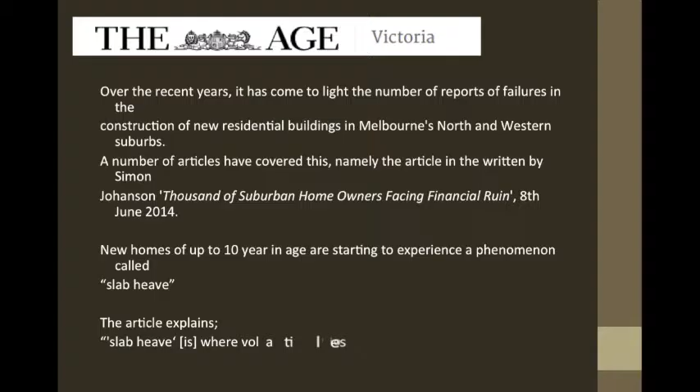Although an extreme title, it concisely sums up the problems being faced by many residents in the northern and western suburban developments. New homes up to 10 years in age are starting to experience a phenomenon called slab heave. As the article explains, slab heave is where volatile soil movements under a home's foundation cause walls to crack, doors and windows to jam, and floors to tilt.

It has highlighted this as a major problem and blames this on inadequate soil reports, suggesting that many thousands of new homeowners in the Wyndham, Melton and Hume local government areas are affected by volatile soil movements occurring under the home's foundation. This is causing walls to crack, doors and windows to jam, and floors to tilt in newly developed homes.

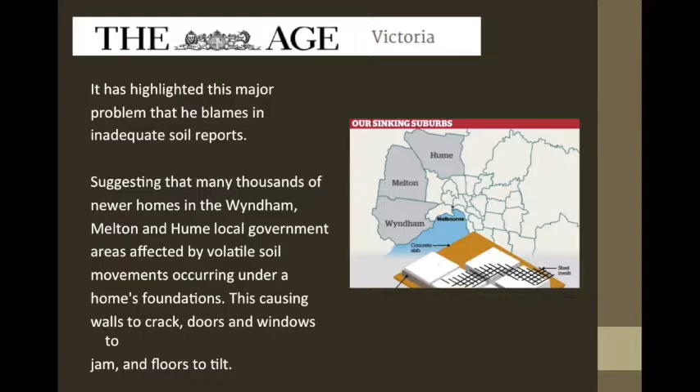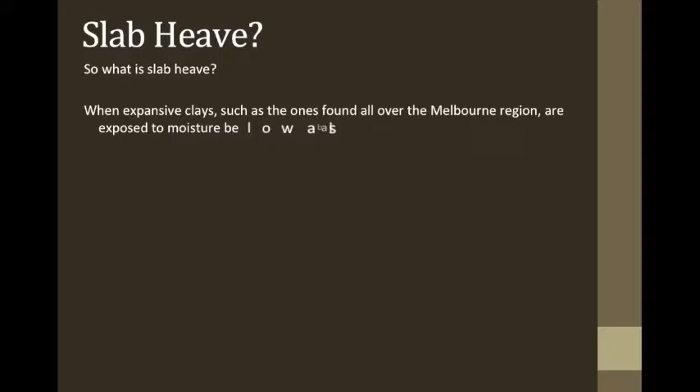So what is slab heave? Slab heave is when expansive clays, such as the ones found all over the Melbourne region, are exposed to moisture below the slab. This results in the clay swelling and expanding, pushing the centre of the slab upward.

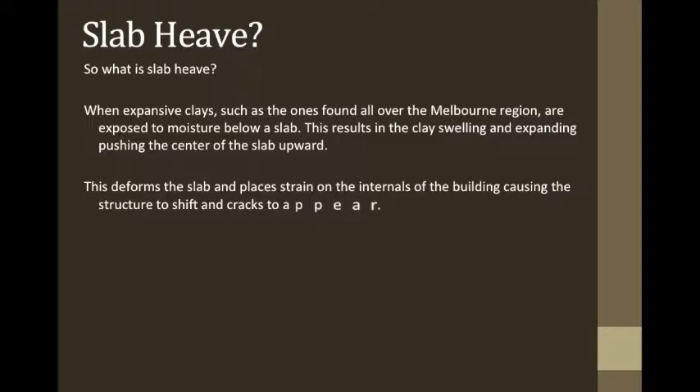This deforms the slab and places strain on the internals of the building, causing the structure to shift and cracks to appear. As you can see in the diagrams, it's where water is pooling unevenly under the building, pushing up in the case of expansive soils when there's too much water content, putting pressure on the slab. Or in reverse, once it's really dry, such as during the drought Melbourne faced for a long time, the soil will shrink, having the adverse effect on the slab.

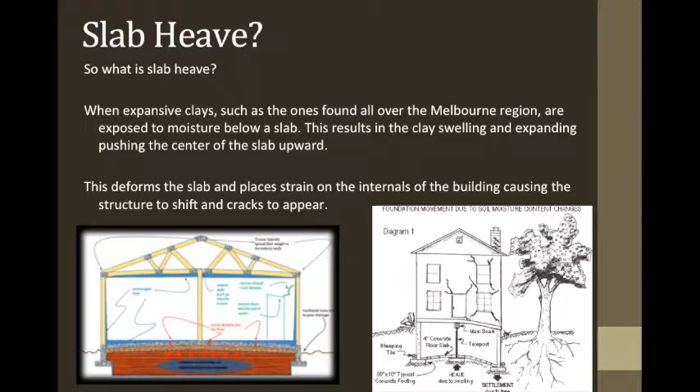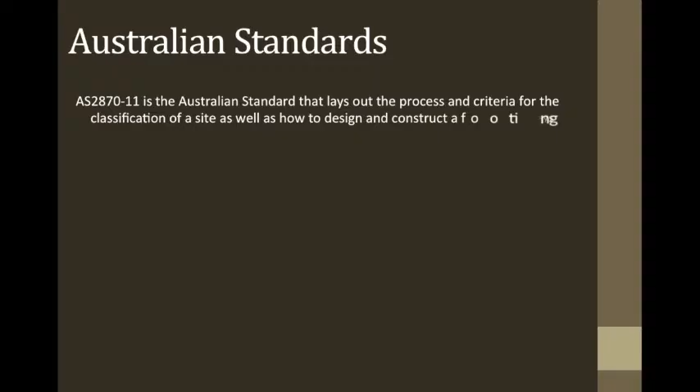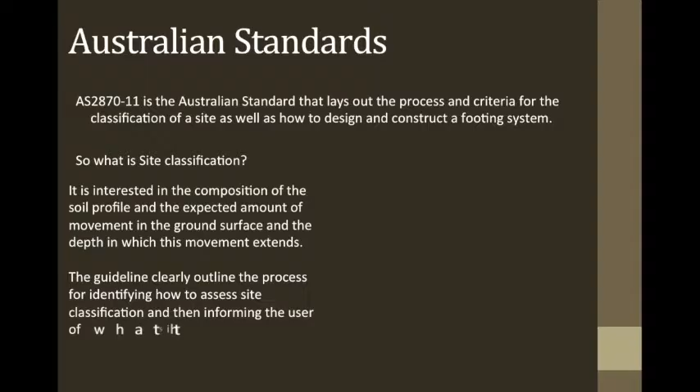Australian Standard 2870 version 2011 is the Australian standard that lays out the process and criteria for the classification of a site, as well as how to design and construct the footing system. So what is a site classification? It is interested in the composition of the soil profile and the expected amount of movement in the ground surface, and the depth to which this movement extends. The guideline clearly outlines the process for identifying and assessing the site classification and then informing the user of what this means and what they need to do next.

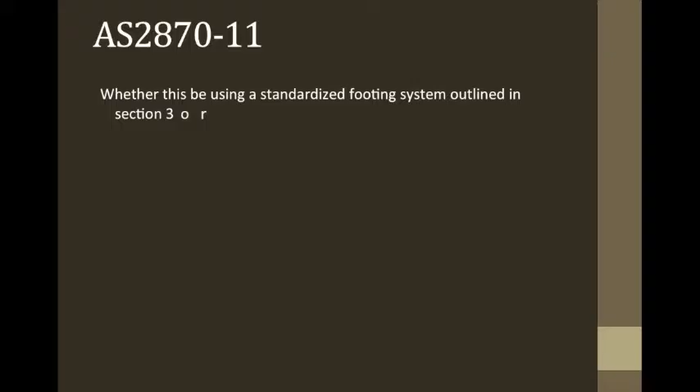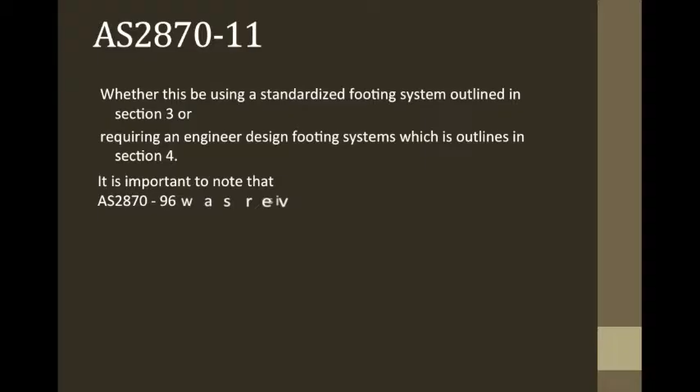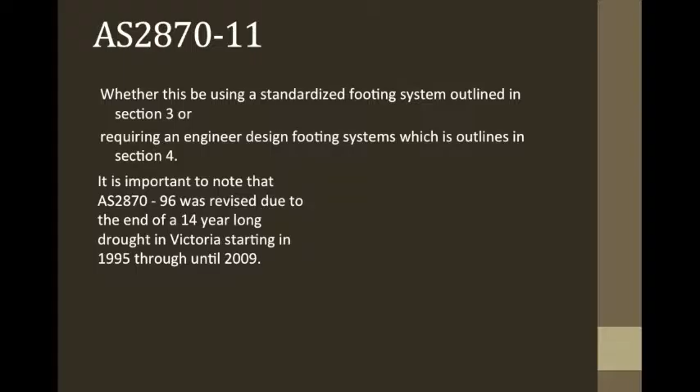Once the site classification has been established, the standards explain whether the footing system will need to rely on Section 3, Standardised Footing Systems, or require an engineer to design a footing system, outlined in Section 4. It's important to note that AS 2870 version 1996 was revised due to the end of a 14-year-long drought in Victoria, starting in 1995 through until 2009, resulting in our now standard AS 2870 2011 version. This drought had a significant impact on soil and slab design over this time, and when it ended it caused a lot of shortfalls, shortcuts and oversights to become apparent.

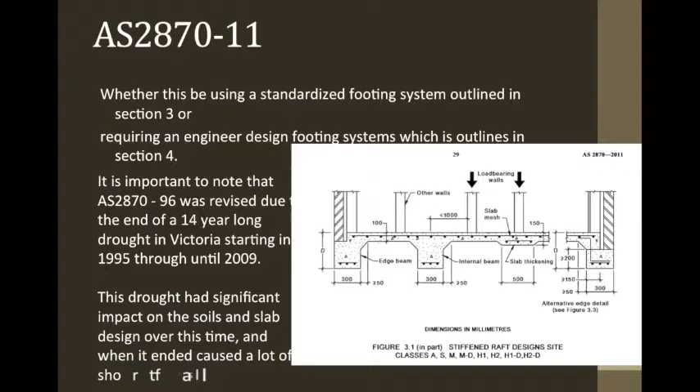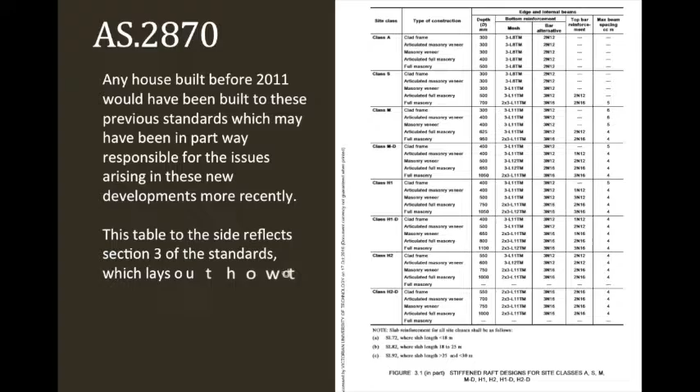Any house built before 2011 would have been built to these previous standards, which may be partly responsible for the issues arising in newer developments more recently. The table to the side reflects Section 3 of the standards, which lays out how to design a footing system that does not require an engineered solution. As you can see in this table, it goes through all the different site classifications, suggesting what type of construction you'll be doing, and gives information on what you actually need to do when designing the slab.

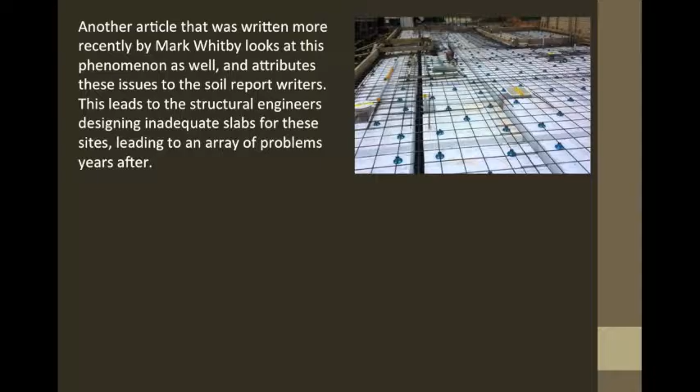Another article, written more recently in November 2015 by Mark Whitby, entitled 'Inadequate Soil Reports, Melbourne's Big Secret,' looks at this phenomenon as well and attributes these issues to the soil report writers. This then leads to structural engineers designing inadequate slabs for these sites, leading to an array of problems years after. He explained that obtaining the cheapest quotes for soil reports may have led many report writers to take a quicker option.

This involved relying on clause 2.2.1b, which states site classifications based on a characteristic surface movement in accordance with clause 2.2.3, as opposed to consulting Appendix D, which may have been required in some of these situations. This resulted in classifications being downgraded, leading to underperforming slabs.

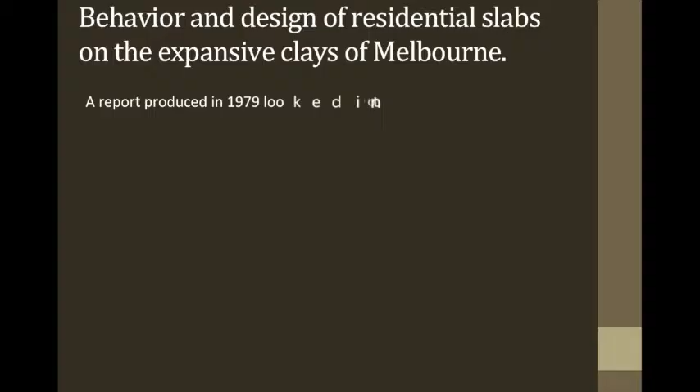Behaviour and Design of Residential Slabs on the Expansive Clays of Melbourne. A report produced in 1979 that looked into the behaviour and design of residential slabs on expansive clays in Melbourne. It identified the problem that Melbourne has when trying to build on these soils.

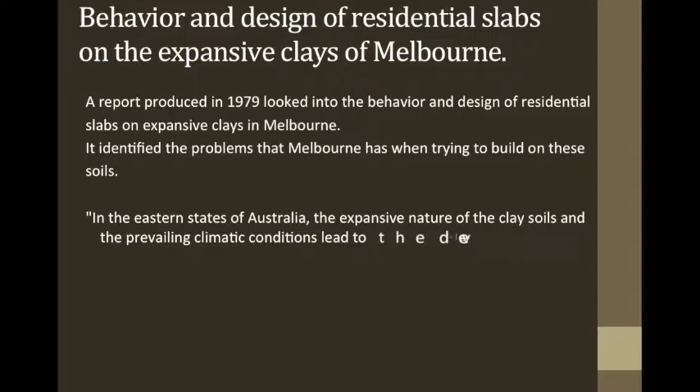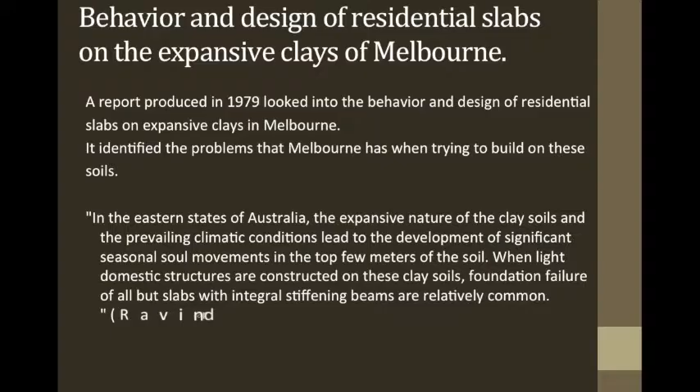I'll take a quote straight from the report, which says: 'In the eastern states of Australia, the expansive nature of the clay soils and the prevailing climatic conditions lead to the development of significant seasonal soil movements in the top few metres of the soil. When light domestic structures are constructed on these clay soils, foundation failure of all but slabs with integral stiffening beams are relatively common.' The Melbourne region soils are identified by their geological origin, being made up of clay soils divided into two groups.

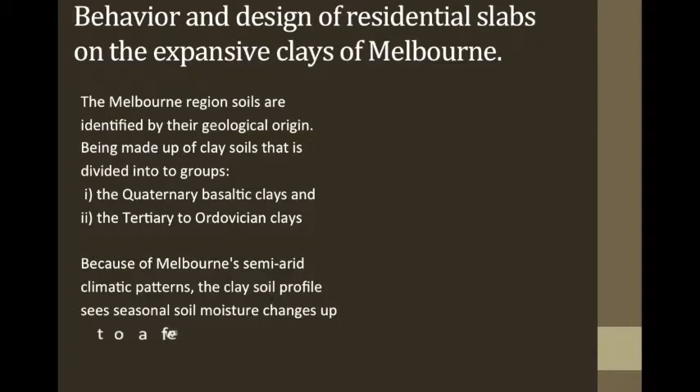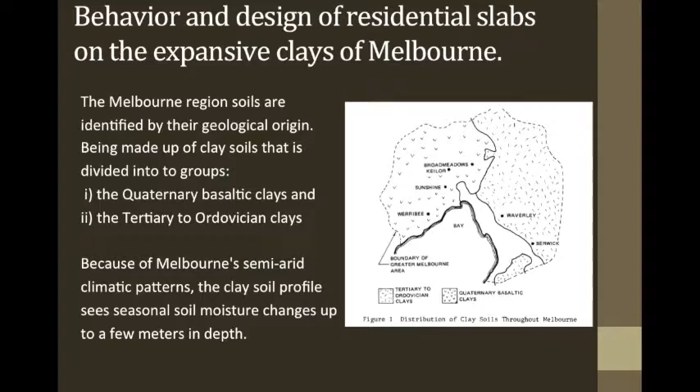The two groups are: 1. The Quaternary basaltic clay, and 2. The Tertiary to Ordovician clays. Because of Melbourne's semi-arid climatic patterns, the clay soil profile sees seasonal soil moisture changes of up to a few metres in depth. As you can see in the image on this slide, the western suburbs of Melbourne are subject to Quaternary basaltic clays, and the east is subject to Tertiary to Ordovician clays.

This leads to cyclic volume changes and vertical movements throughout the year, which can be described as seasonal heave. When an impermeable cover, such as a slab, is poured onto this soil type, it will affect the moisture in the clay and alter the soil moisture change pattern. The clay underneath the slab will be unable to release moisture as freely as it is used to. This will lead to slab heave, which in turn puts strain on the structure of the building, leading to cracks and failures.

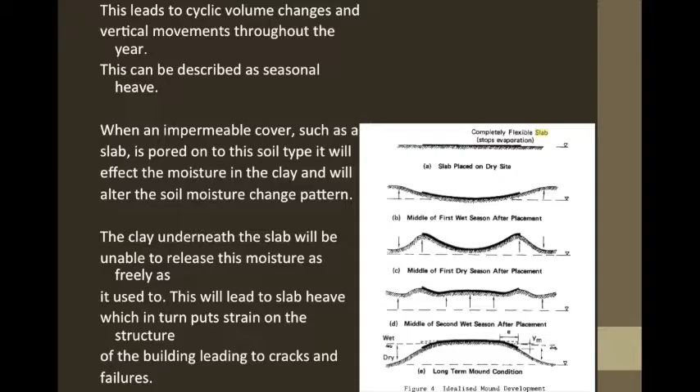As you can see in this image here, it shows different situations with moisture content under the slab. As clays absorb water, they tend to expand, and as they dry out, they will shrink, and you will have different defects in your slab depending on what's happening in the ground underneath.

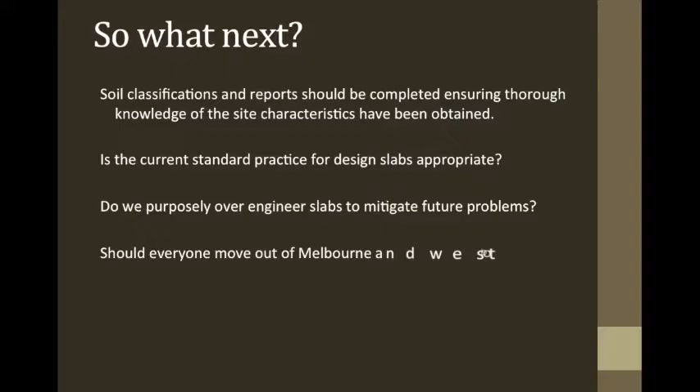So what next? Soil classifications and reports should be completed to ensure a thorough knowledge of site characteristics has been obtained. But is the current standard practice for designing slabs appropriate? Do we need to purposely over-engineer slabs to mitigate future problems? Should everyone move out of Melbourne and we stop building on these expansive clay sites?

Now we'll be talking about bracing within the construction industry, and how that will lead to construction failures.

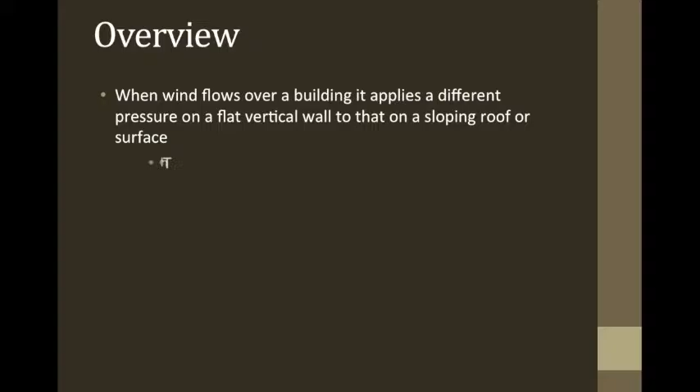Overview. When wind flows over a building, it applies a different pressure on a flat vertical wall to that of a sloping roof or surface. The Building Code of Australia have set tables that show the nominal bracing necessary to keep a building standing. The tables need to know the ratio between how much roof area the wind sees as opposed to how much wall area the wind sees. The building width and roof pitch establish this ratio.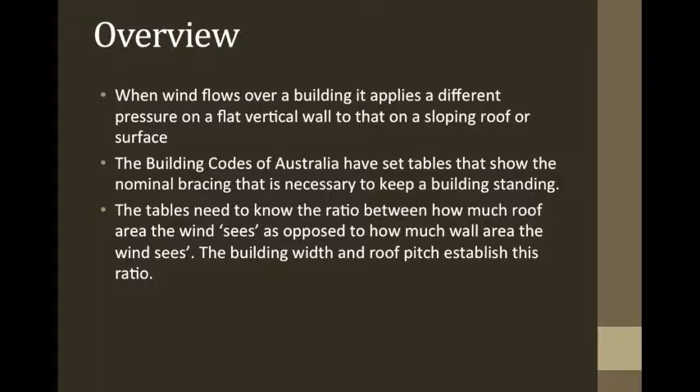Area of elevation: to work out the nominal wind bracing, you must work out the area of elevation, or the area that will be affected by the wind. Except for simple L, H or U shapes, where each part of the building has an identical width and pitch, or contains no vertical surface on the roof area such as a gable or skillion, each of the parts must be considered individually and not added together. Bracing should be distributed throughout the house approximately in proportion to the forces relevant to each shape.

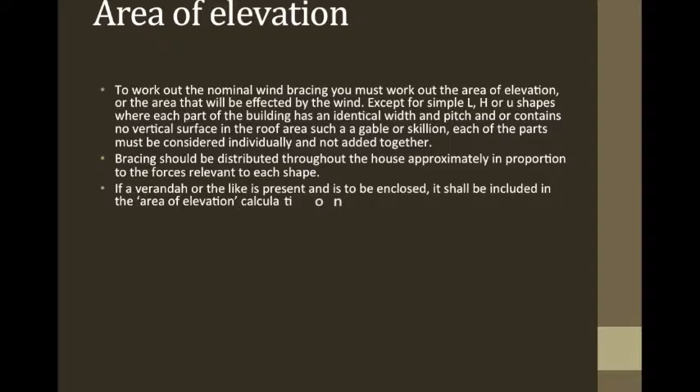If a veranda or the like is present and is to be enclosed, it should be included in the area of elevation calculation. A veranda should be considered enclosed if any part of the main building projects out into the veranda, or an end is filled in with lattice or similar. Once the area of the house has been identified, it is time to work out the racking force necessary.

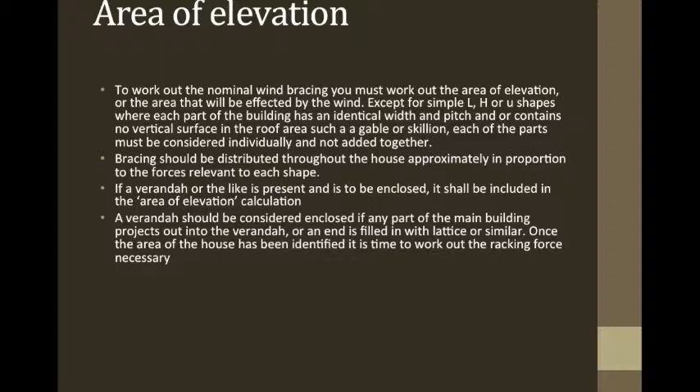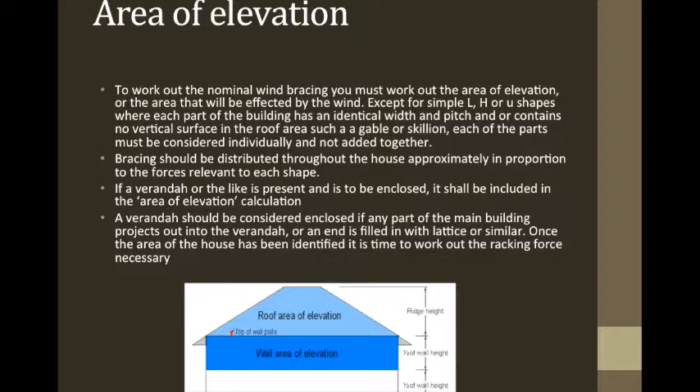Below, you will see an image of a roof area of elevation and a wall area of elevation. These are the two areas that you'll be calculating to get your racking force.

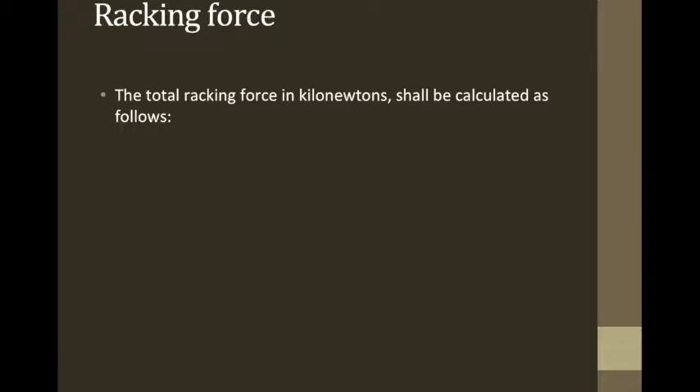Once the area of elevation has been met, racking force is the next component to work out. The total racking force in kilonewtons shall be calculated as follows: project area of elevation in meters squared, times lateral wind pressure in kilopascals, equals total racking force.

The image below shows how racking force pushes a building across, and uplift brings over the top of the building and brings the wind upwards.

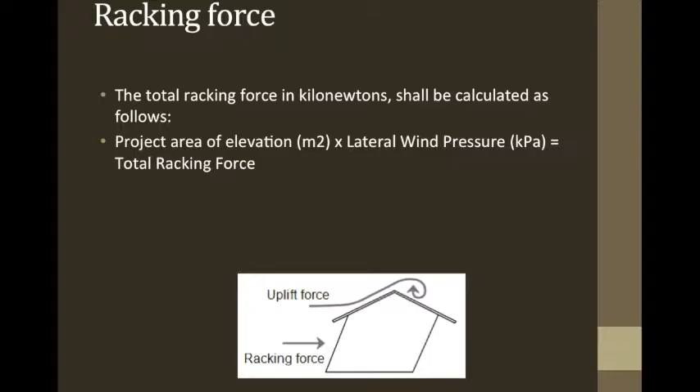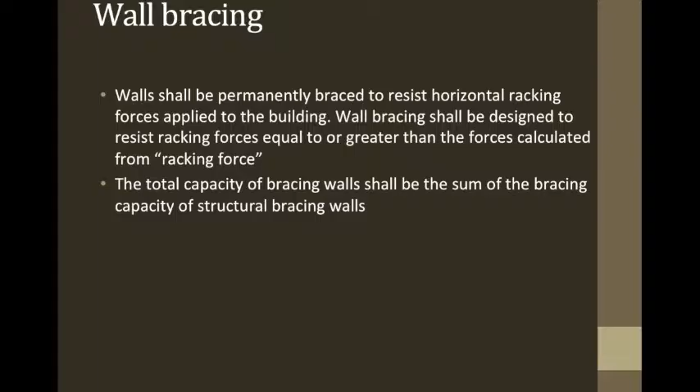Wall bracing: walls shall be permanently braced to resist horizontal racking forces applied to the building. Wall bracing shall be designed to resist racking forces equal to or greater than the forces calculated from racking force. The total capacity of bracing walls shall be the sum of the bracing capacity of structural bracing walls.

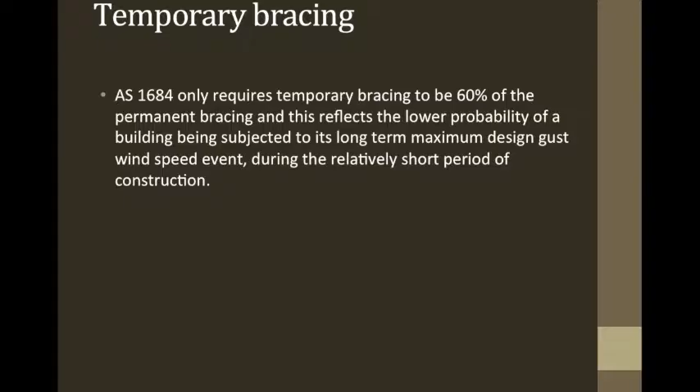Temporary bracing: Australian Standard 1684 only requires temporary bracing to be 60% of the permanent bracing, and this reflects the lower probability of a building being subject to its long-term maximum design gust wind speed event during the relatively short period of construction. Below you will see an image of the temporary bracing coming off at a 45 degree angle from the top plate all the way down to the bottom concrete.

This will be dynabolted. This will have a timber dynabolted straight into the ground and then timber nailed on straight to that.

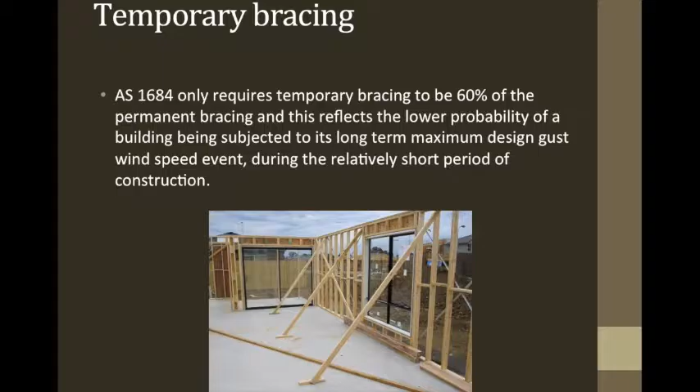In conclusion to bracing, nominal bracing must be met through Australian standards, while temporary bracing of the building must meet 60% of the nominal bracing required. Otherwise, a failure in the construction will occur and the building has extreme chances of falling over.

Below you will see two images of construction sites that have not had enough bracing and have fallen over. The first one on the left-hand side is from out in the west of Victoria, where it is a lot flatter plains, and obviously the wind's picked up, and the builder has not braced that building enough.

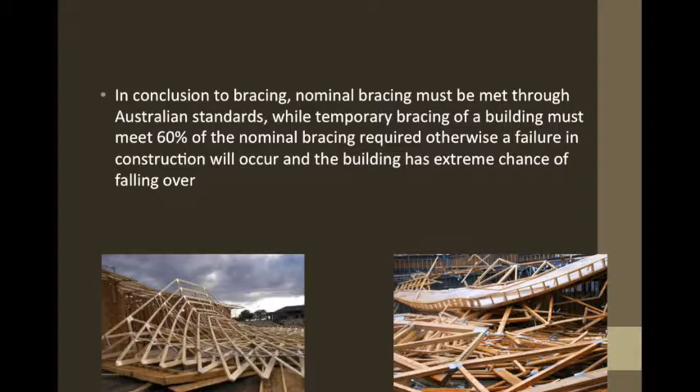So this part of the case study, I'm going to focus on the effects and problems caused to a building from termite damage.

Termites, also referred to as white ants, serve an important function in nature by feeding off dead trees and converting them into organic matter. Unfortunately, the timber we use in constructions such as subfloor, wall, roof framing, pergolas and decks are equally as appetising to some of these insects.

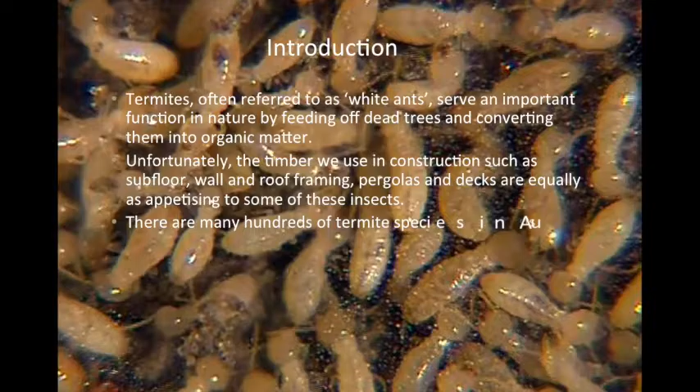There are many hundreds of termite species in Australia, and about 20 of these can eat through the solid timber in buildings, causing serious damage and expense. They require an ideal temperature and humidity level to survive. They live in colonies of hundreds of thousands, sometimes 7 metres below the soil surface, and have extensive tunnel networks that can extend up to 100 metres from the nest.

So this is a close-up image of what they look like.

Problems that they cause: termites thrive on moisture, making buildings settled in the damp, humid southern states a prime target for these pests. They can cause extreme amounts of structural damage to the home, creating safety and cost problems. As well as the structural timber in the building, termites can also damage plasterboard, carpets and fit-out timber.

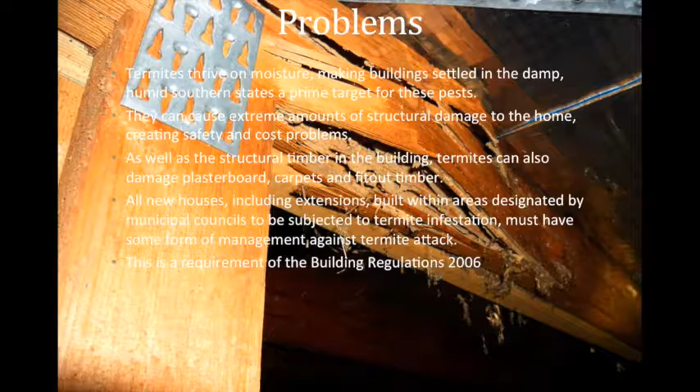All new houses, including extensions built within areas designated by councils to be subjected to termite infestation, must have some form of management against termite attack. This is a requirement of the Building Regulations 2006. It also means all new buildings and extensions need to abide by Australian Standard 3660.

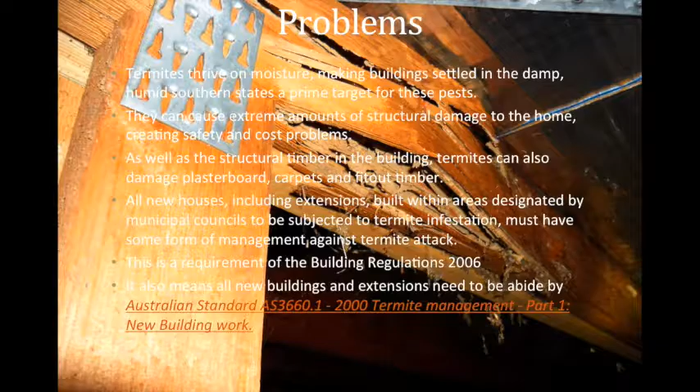This is the extent of damage they can create to structural members. This is a roof truss, so you can picture the amount of damage this would create if any load was applied to it.

Prevention techniques: smart building design helps to minimise the risk of termite damage. Strategies include reducing the amount of timber used in buildings, designing the concrete slab with edges exposed for inspection for termite activity, laying timber floors with underfloor inspection access points, considering open or at least well ventilated subfloor areas, ensuring good inspection access and crawl space under the house, and providing good surface drainage to keep the subfloor area dry.

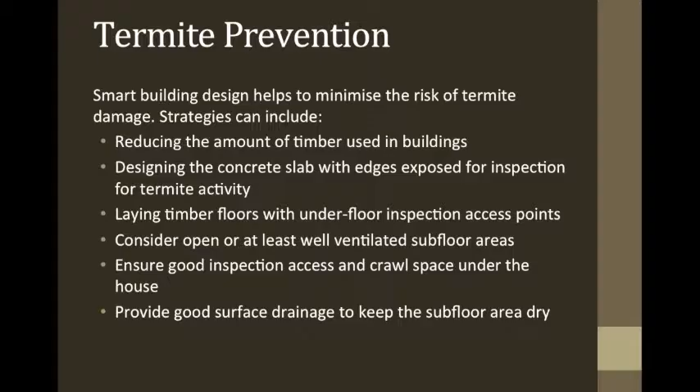It also includes use of treated timber framing to minimise the materials at risk, and not building right up to the boundary.

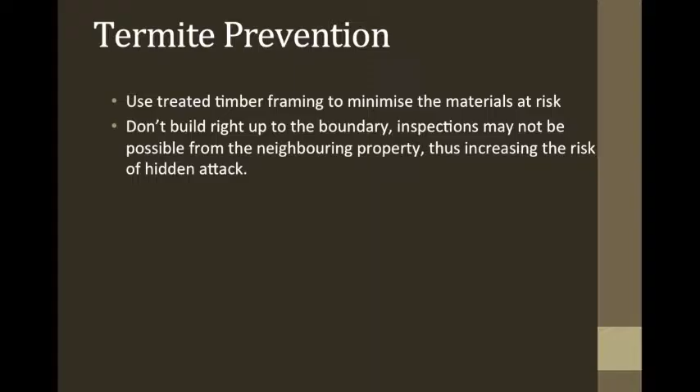Inspections may not be possible from the neighbouring property, therefore increasing the risk of hidden attack. Metal stirrups should be used for setting pergola, gate and veranda posts into the ground.

Proposed extensions or alterations to the building must not result in the removal of existing termite barriers or access for inspections. Plumbing leaks, drainage problems and roof leaks should all be dealt with quickly, as damp conditions attract termites.

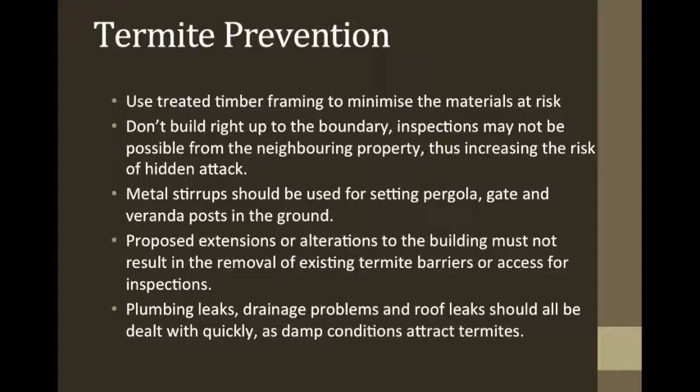However, the main types of prevention are physical barriers and chemical barriers.

Physical barriers include ant caps, stainless steel mesh, granite chip barriers and termite sheet under slab and around pipe penetrations. Chemical barriers include a chemical termite barrier, which involves applying a liquid chemical to the soil, either under concrete flooring and/or around the entire perimeter of the building's foundations.

There are various types of chemical termite barriers. Some chemicals are designed to kill the termites, and others are designed to deter them. Some barriers will require ongoing inspections, maintenance and/or chemical replenishment.

This is an image of a termite nest hidden in the wall cavity. There are a number of ways they can get into there — they can even get through cracks in the slab up to 1.5 millimeters wide.

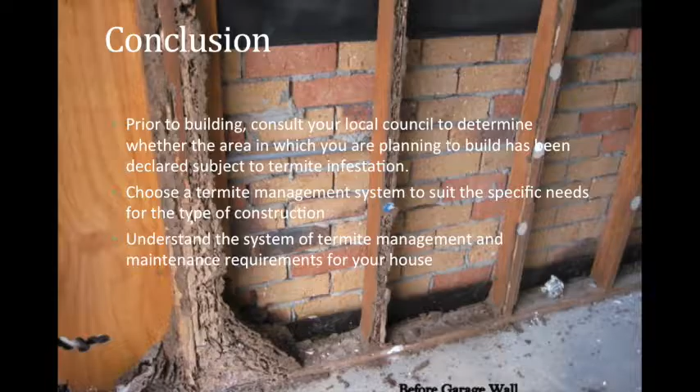To sum up, prior to building, consult your local council to determine whether the area in which you are planning to build has been declared subject to termite infestation. Choose a termite management system to suit the specific needs for the type of construction, and understand the system of termite management and maintenance requirements for the building.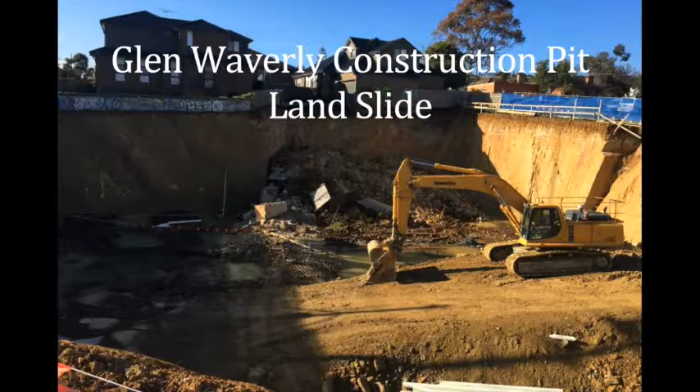Glen Waverley Construction Pit landslide presentation. Today I'll be talking about what happened, why it happened, and the procedures to rectify it.

The case study: back in July 2015, a site planned for a $5.5 million medical childcare facility at 170 Highbury Road, Glen Waverley, was excavated without following correct building practice. It caused the soil around the perimeter of the site to slide, which was also holding the foundations of the neighbouring properties. Here are a couple of photos of the site.

What they did wrong: the incorrect building process was conducted. There was no regard for the surrounding infrastructure by the builder, the building surveyor, or the contractors who did the work. There was no boreholing done, no concrete piling done along the perimeters, no shoring done anywhere along the site, and no concrete wall linings done to complete the job.

What is boreholing in construction? A borehole is a narrow shaft dug into the ground, either horizontally or vertically, to either assess the soil levels for its classification, or to start the process of underground foundations with the use of concrete piling to follow.

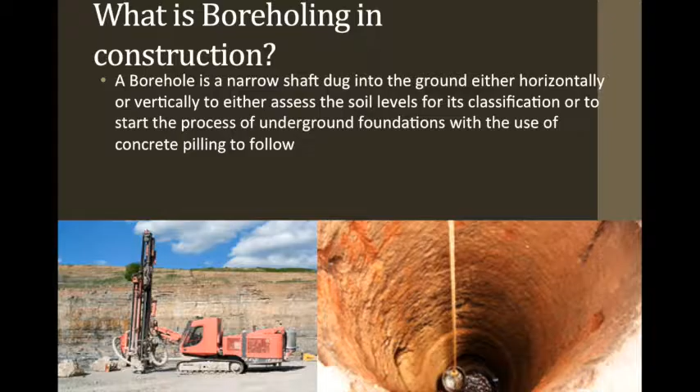Here are two photos showing what boreholing is. One shows the hole which has been dug, and the second shows the machine and how it is performed.

In this case, there was no concrete piling done. So what is concrete piling? Concrete piling is used in deep foundations, a type of foundation which transfers building loads from the earth's surface to subsurface levels. It is also used on the boundary of the site to excavation, to eliminate the event of landslides once soil is removed.

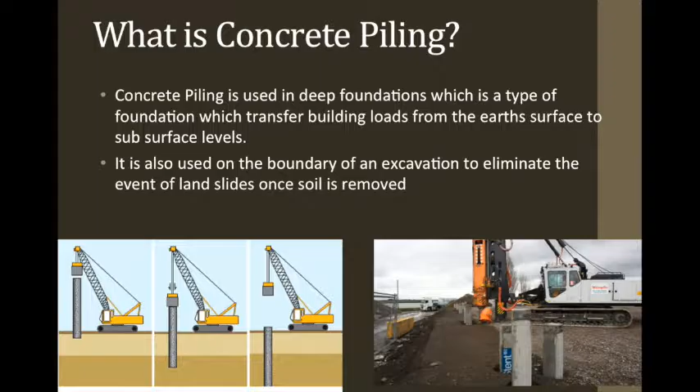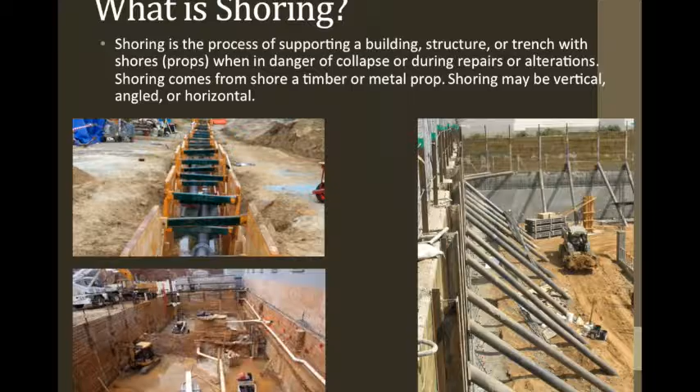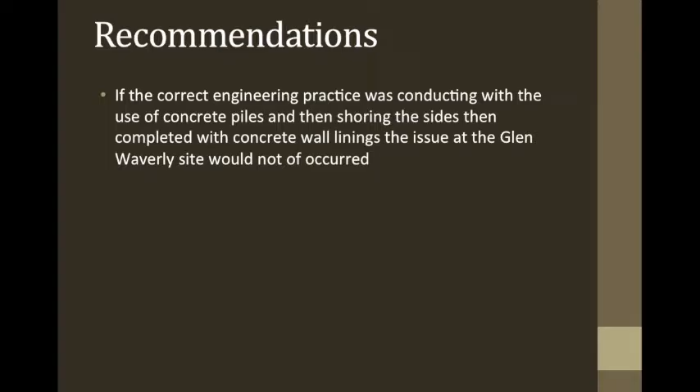What they did instead is fill the hole back in with about 1,000 truckloads worth of soil and have now left the site empty. It will now be some time before any work can be done, as the soil put back into the hole needs to settle.

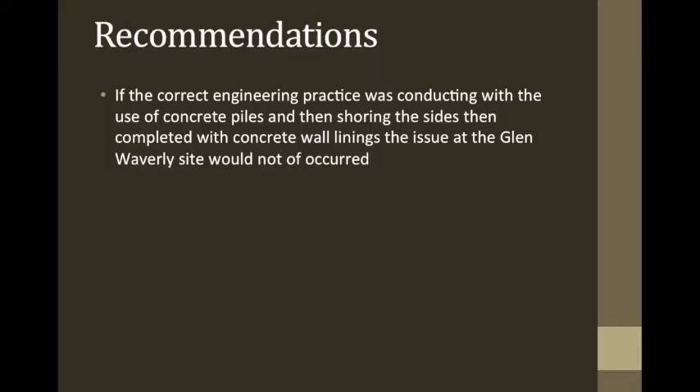Thank you for listening and watching our video. We really hope, on behalf of all four of us, that we have given you an overview of causes of failure in construction and a simple understanding of four different elements that could lead to causes of failure. Thank you.